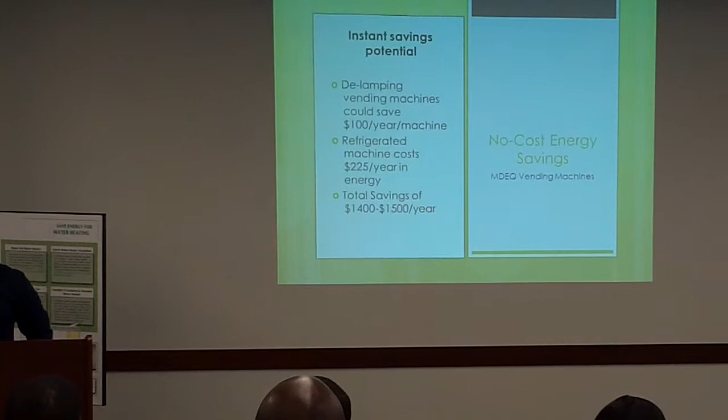All right, so in coming and discussing ideas about how to save energy around the office, the first thing we really looked at were the vending machines. There's 5 here. They're located on the second floor, and there's 8 at the North State building.

So what we were thinking about doing is, if you de-lamp all of the machines, you could save per machine $100 a year. And there's one here in particular on the second floor, in the back corner, that's a refrigerated machine that it doesn't seem that anyone ever uses.

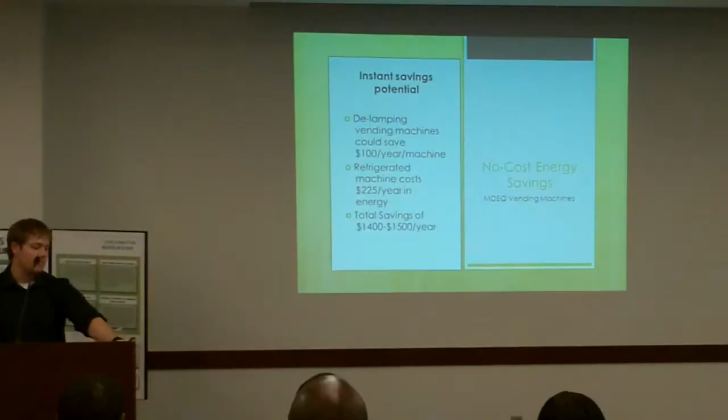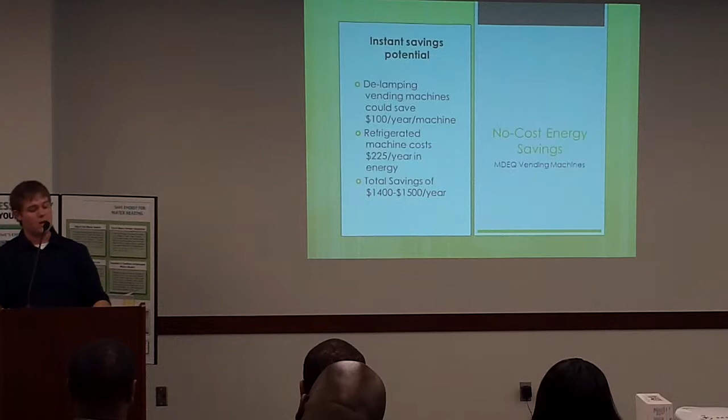So our rationale is, why not just get rid of it, saving in that instance $225 per year just off that machine alone. And looking at their total savings of $1,400 to $1,500 a year, just instant, no cost, no investment, instant savings in that area.

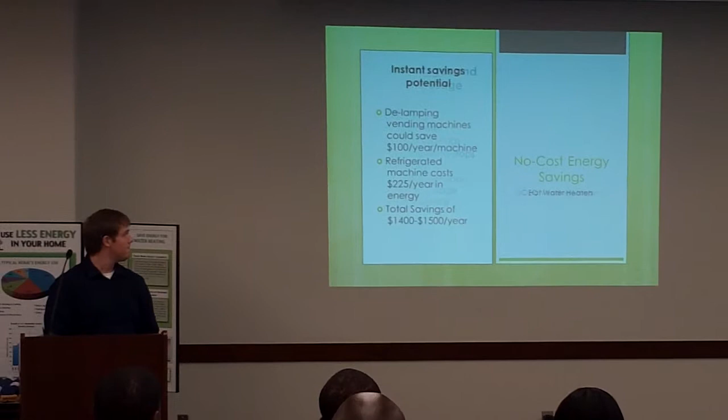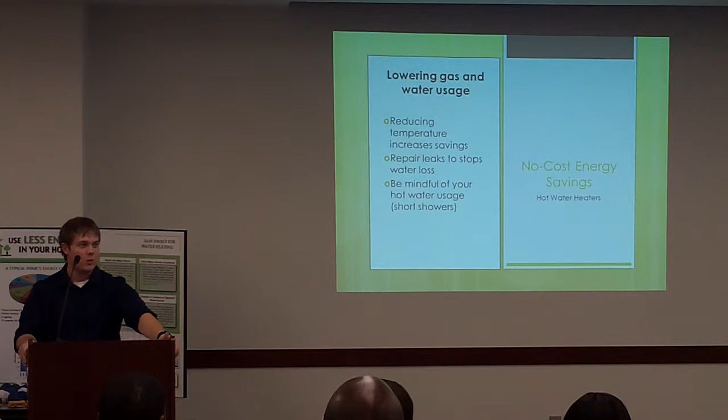Another instance, this one useful for the home as well, is lowering the temperature on your hot water heater, which also instantly produces savings. An optimal temperature that we looked at was 120 degrees Fahrenheit. We'll look at that in a second.

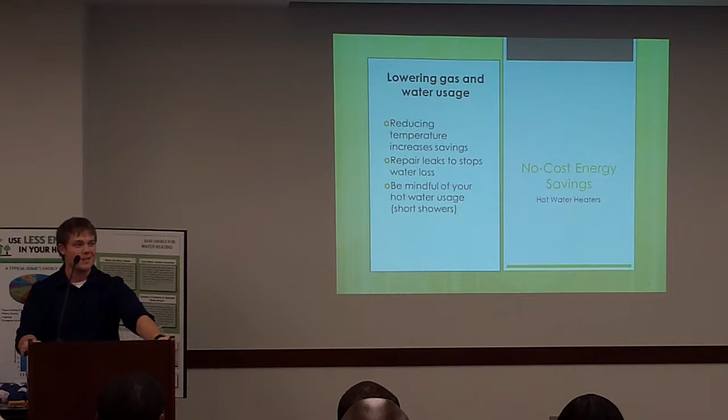Another thing is to repair water leaks. Being mindful of how much water you're using to take a shower, not taking real long hot showers, just by demand. It doesn't hurt every now and then to relax and all that, but for the most part, be a little bit more mindful of that.

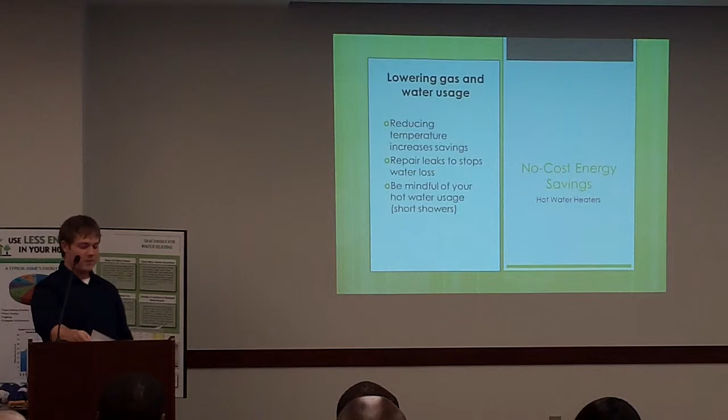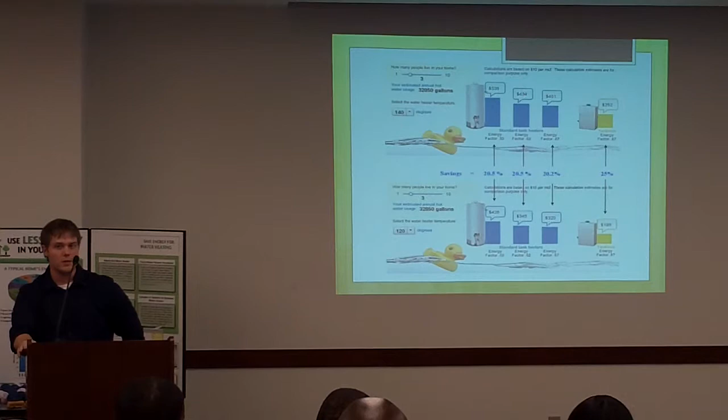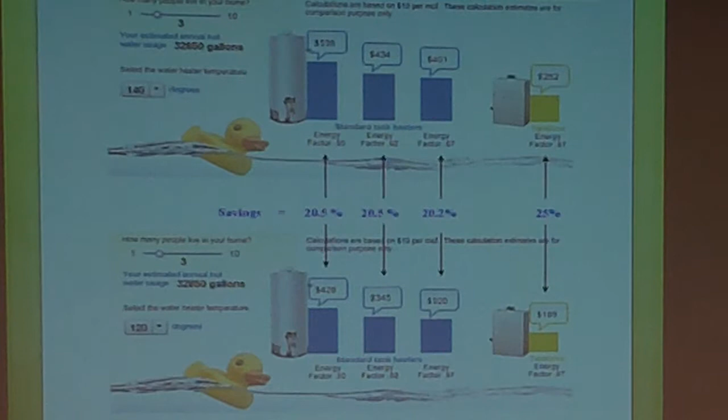Next slide. As you can see by this graphic, setting your thermostat temperature lower, in this case from 140 degrees Fahrenheit to 120 degrees Fahrenheit, will actually save for the standard hot water heaters about 20% per year. That's annual savings just off your hot water heater, and then for a tankless, 25%.

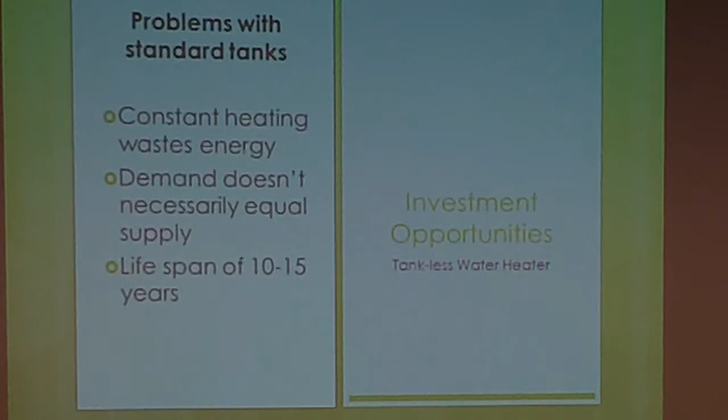Now, problems with a standard water heater, such as it's constantly on, it never goes off, it's always heating water. It's not by demand, and so your demand does not necessarily equal supply. And they only have a lifespan of about 10 to 15 years. So if you're looking at a future purchase, perhaps a tankless water heater.

And pros of that would be such as they're 22% more efficient on average. It's unlimited hot water because it's not just filling up a tank, heating that, and then giving that to you. It's on demand. There's a 20-year lifespan typically that you see out of them. It reduces a lot of wastewater, such as in the home, having to flush the cold out of the pipe to heat the water up.

Just real by demand, but some cons as well, such as they're more expensive. I think they run up to about $2,000 in some instances, so there's a longer payoff period there, but it is there. And that's the important thing about it, I feel, is that eventually you will be seeing your savings in it.

Another thing is that once a year probably you'll want to have the pipes flushed out just to get rid of the debris deposits. A lot of standard tanks, you have to do that with those too, but a lot of them are self-cleaning. But in case of high calcium deposits, or hard water, you may need a water softener.

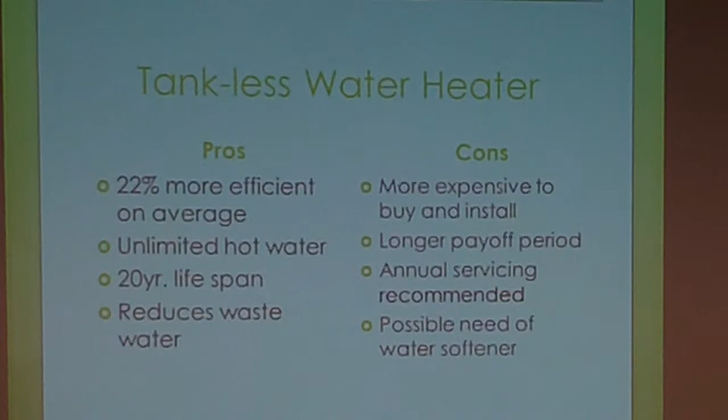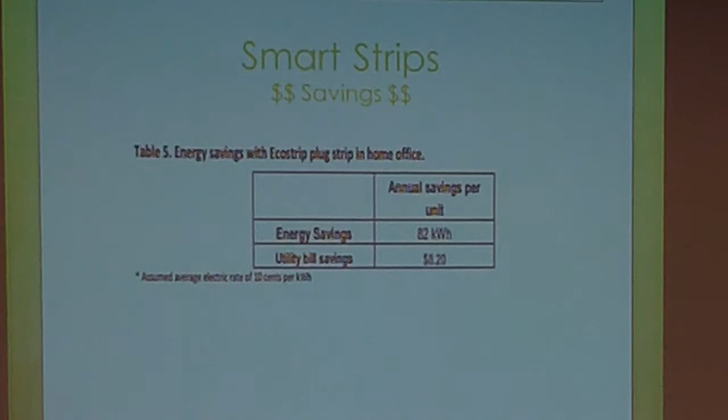Next slide. And what that amounts to, just on that one station, is about $8.20 per year. Now, usually you can get smart strips for about 10, 15, 20 bucks. Some are more expensive, maybe about 40, with more outlets and such. But that's saving about $8.20 per year. So there's a payoff period, 3 or 4 years in some instances. But it is there, and then 10 years down the road, how much money did you save since then? Next slide.

Now, being able to properly implement a smart strip, I think it's still really user related, it's still depending on your habits. So that's where I think your biggest savings will be. So we were looking at implementing energy audits to keep the staff mindful. And for this project, we actually separated out into energy teams to work on these presentations that you've seen.

And I was thinking, maybe something like that to go around and do random audits from time to time and make sure that people are not forgetting to turn their stations off, and getting reports from that, analyzing those reports, analyzing if there's a problem area or something, getting feedback from your staff, suggestions, things of that nature. And then when you have a staff meeting, maybe working these reports into that meeting as well, some awareness workshops, something along those lines.

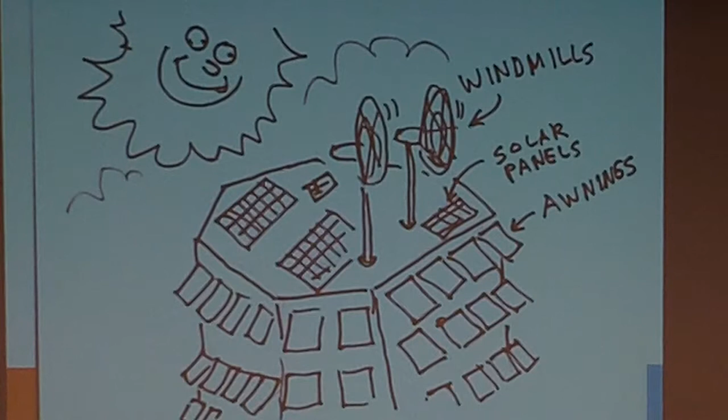We go to more practical things. We can use our windows. We don't need to turn the lights on in our offices most of the time. We just let the sun shine in, or just a little natural light. And arrange your office a little bit, you know, to take maximum use of the light.

Most of your offices, you don't need to have your overhead lights on. And the same thing will go for certain lobby areas with big windows. Just keep the overhead lights off, and get plenty of light.

Next slide. And this is a very popular idea. Everyone suggested it, that is you have these motion sensor switches. Some just suggested them for the bathrooms or closets, but actually they'll work in any room. And I don't mean necessarily motion detectors, because if you've ever had one of those switches, you know, every 5 minutes or so you've got to do this or whatever. Otherwise you find yourself sitting in the dark.

So they do have infrared versions that'll detect the person inside the room, so you don't have to worry about, if you're too still for too long, the light going out on you.

And the next slide. Another thing is, you can keep your overhead lights off a lot of times, and really all you need is some office desk lights. It's one little light bulb in there, and it's energy efficient, of course, and that will let us do most of our work at the desk without really inconveniencing us. The light's probably better anyway. And then we go to the next slide.